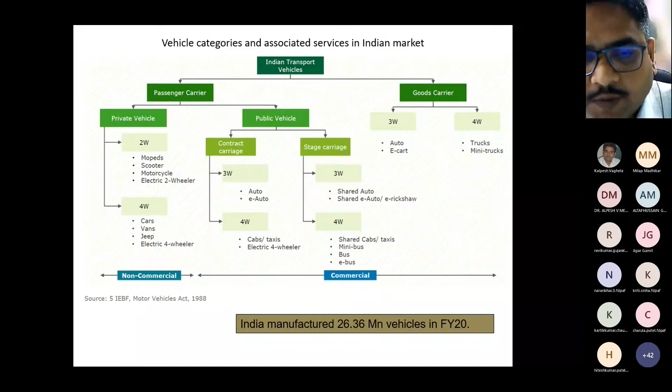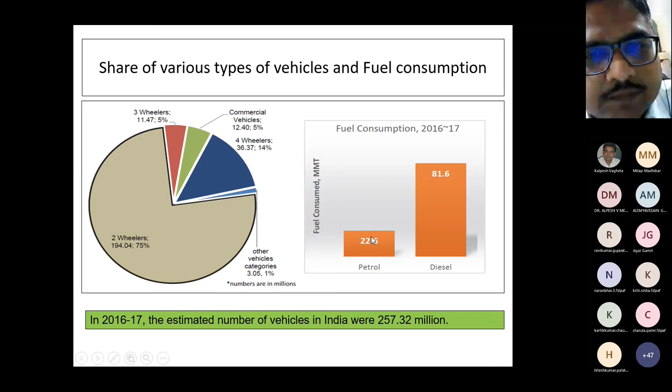So data indicates about 76 million metric tons of diesel and about 24 million metric tons of petrol is consumed by all sectors. Out of this, the Society of Indian Automobile Manufacturers estimates that 100% of gasoline, that is the 24 million tons, is consumed for the transport sector, and 50% of diesel is consumed for the road transport sector. This shows we are consuming a lot of petrol and diesel for the automobile sector.

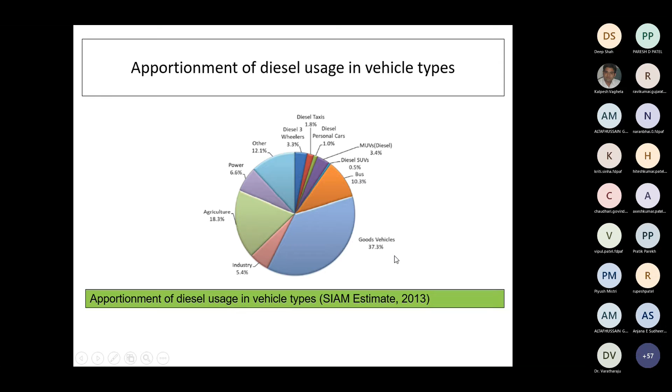In diesel also, they bifurcate the percentage used in different sectors. You can see that 37.3% is used by goods vehicles and diesel cars, and the agriculture sector uses 18.3%. Industry uses 5.4% of diesel. So mostly 50% of diesel is used by the automobile sectors.

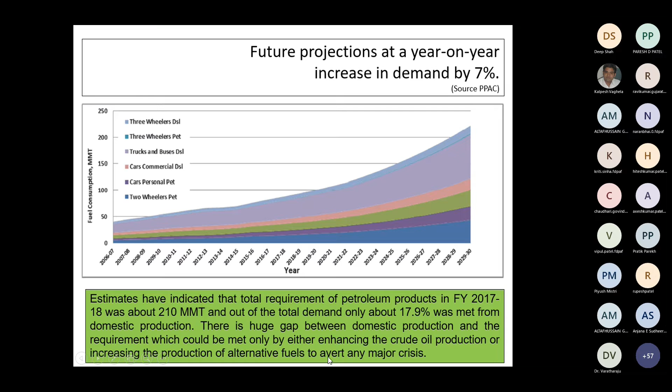Now for the future projection of fuel consumption, this graph shows that from 2006-7 to 2029-30, it is continuously increasing. Estimates have indicated that the total requirement of petroleum products in financial year 2017-18 was about 210 million tons, and out of the total demand, only 17.9%, approximately 18%, was met from domestic production. There is a huge gap between domestic production and requirement, which could be met only by either enhancing crude oil production or increasing production of alternative fuels to avert any major crisis.

If you see the domestic production as well as the import percentage, domestic production of oil is continuously decreasing due to unavailability of resources, so we have had to increase imports by 3.45% in the recent 5 years. Likewise, in natural gas also, imports increased by 8.51%. So the decline in production of crude oil and natural gas during financial year 13 to 19 has further contributed towards the country's import dependency. Crude oil import dependency is 88% in 2019, and natural gas import dependency is 36% in 2019.

This shows that a large part we take from imports, and a very small part is domestic production, which is a limitation from our side in our country.

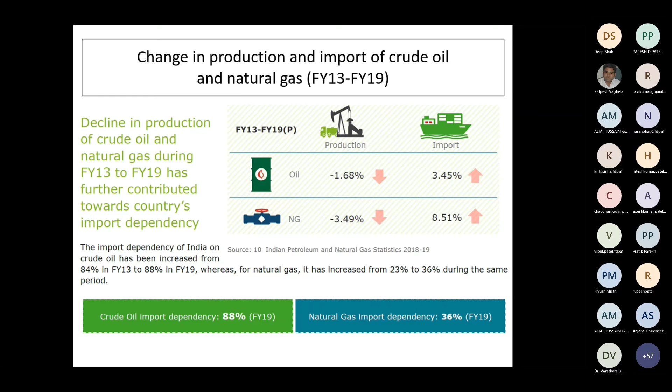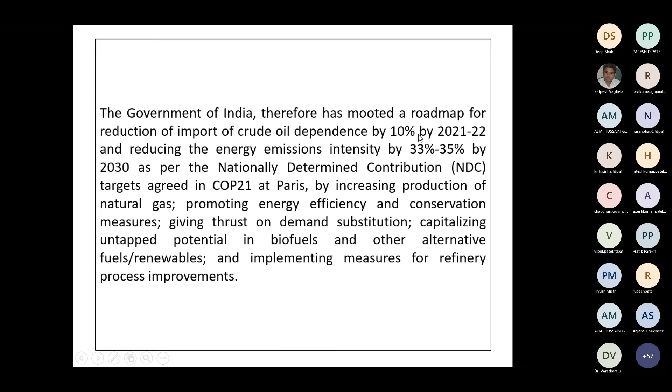Government of India has mooted a roadmap for reduction of crude oil import dependence by 10% by 2021-22. They have outlined several strategies including increasing natural gas production to reduce imports, promoting energy efficiency, and potential use of biofuels and other alternative fuels to increase the reduction in imports.

The second reason is about emissions and air pollution. What fossil fuels are we using that lead to emissions and air pollution? India was ranked 5th among the world's most polluted countries in 2019. This shows there are many sources of pollution, one of which is automobile vehicles. Also, data shows that out of the 10 most polluted cities, 6 are from India in 2019.

You can also find that 12.5% of total deaths are due to air pollution. Today itself, in the newspaper, it was highlighted that 20 lakh people died in 2020 due to pollution. With alarming air pollution levels across India, the urgency of national level action plans was therefore inevitable.

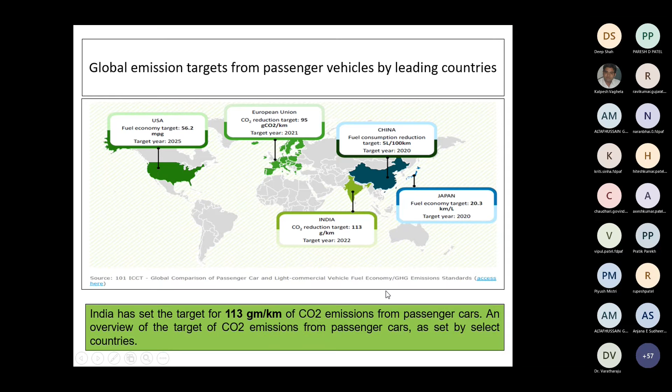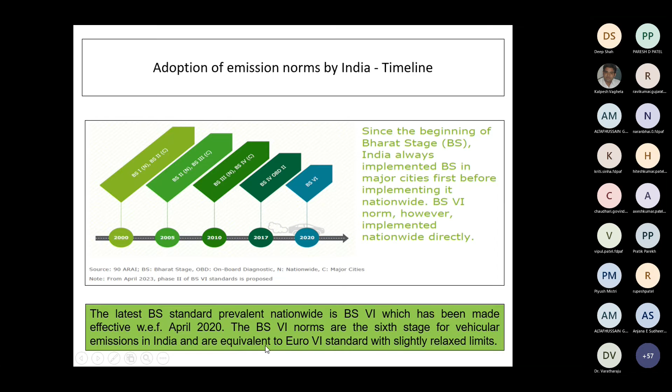Here you can see other countries' emission levels and commitments. To reduce emissions, we also introduced BS1 to BS6, with BS6 introduced in 2020 to stringent the norms about emissions from automobiles. The latest BS6 was introduced in April 2020, and BS6 norms are set for vehicular emission in India, equivalent to the Euro 6 standard with slightly relaxed limits.

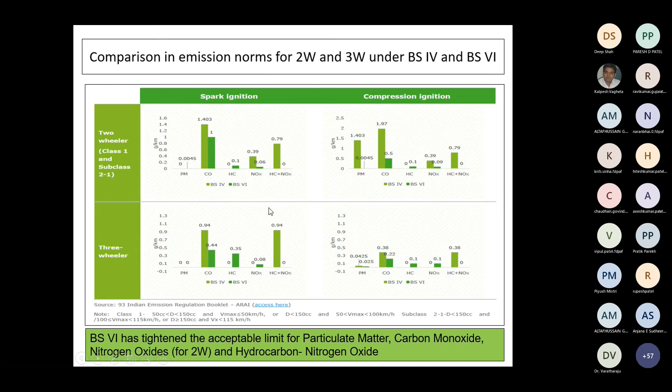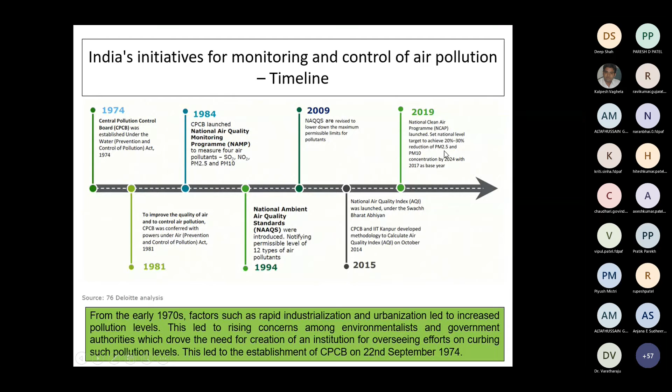A lot of policies came in 2019. There is the National Clean Air Program launch, which set a national target to achieve 20 to 30% reduction of PM2.5 and PM10 concentration by 2024. We have set a lot of parameters, and many agencies have also been developed.

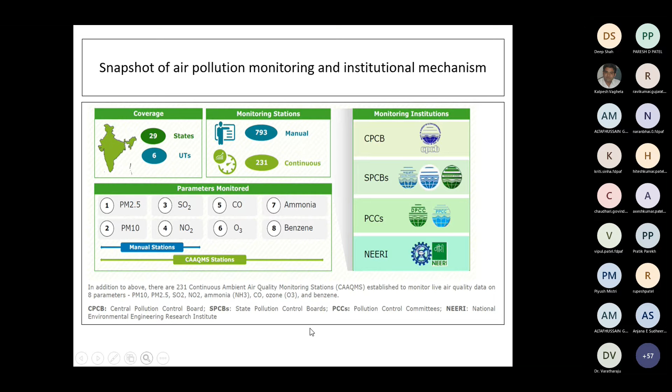At the central level, there is the CPCB. At the state level, there is the SPCB, and they monitor the parameters. Here you can see on the left side, PM2.5 and PM10. They also monitor SO2, NO2, ozone, ammonia and benzene levels. Their main function is to measure all these things and control them.

In 2015, the Prime Minister of India launched the National Air Quality Index for monitoring air quality in major cities across the country on a real-time basis, enhancing public awareness for taking appropriate action to reduce air pollution. The AQI is promoted as one number, one color and one description to inform the public about air quality in a simple and easily understandable format.

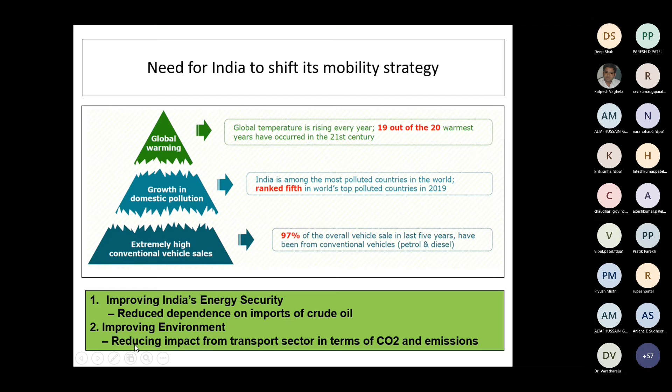So improving India's energy security - the first concern is reducing the dependence on import of crude oil. Second thing, improving the environment by reducing the impact from the transport sector in terms of CO2 and emissions.

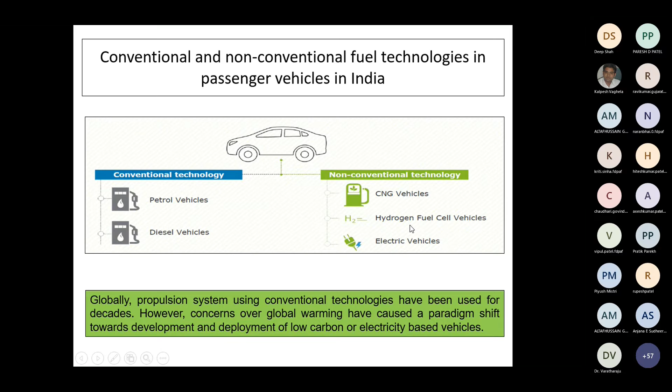Conventional fuels are petrol and diesel. Non-conventional fuels we all know include CNG, hydrogen, biofuels and electrical fuels. The alternative fuels - we have to shift towards alternative fuels, and there are several potential solutions to earlier discussed issues: reduced consumption, increased production, or shift towards alternative sources of energy.

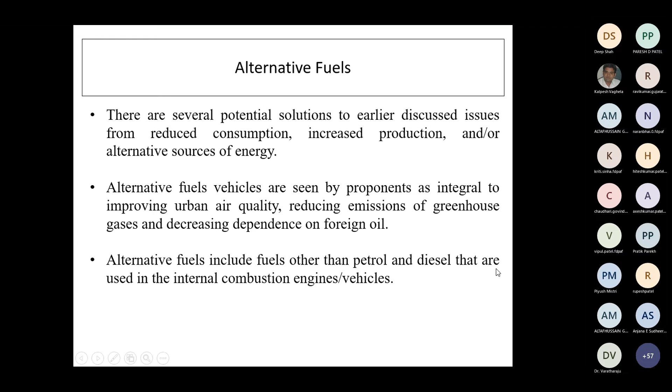Alternative fuels include fuels other than petrol and diesel that are used in IC engines or vehicles. Alternative fuels provide the best option to replace traditional fossil fuels and provide opportunity for reducing import of oil bills and mitigation of pollution, and can be produced sustainably. So here that is the main thing, that it can be produced sustainably.

Second thing is that alternative fuels are a focus area of the world also due to their inherent benefits in terms of economy, high quality of energy, environmental compatibility and renewability. Therefore, several countries like USA, Brazil, Canada, Australia, China, Thailand and most European countries are in the process of transitioning to a higher share of alternative fuels to avoid economic and environmental crisis.

There are so many alternative fuel options in India for automotive purposes. First, in public transport, we shift towards CNG or LNG. There are others too - hydrogen, biofuels, electric and solar power mobility would form options for alternative fuels. We will take them one by one in brief.

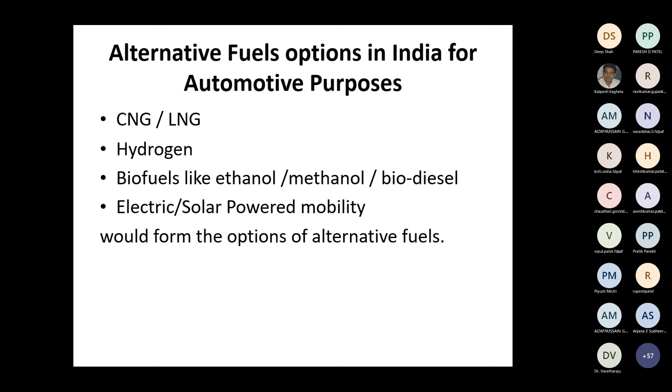CNG is compressed natural gas. We are all aware that it is methane stored at high pressure. Italy was the first country to use natural gas as a vehicle fuel in 1920.

GAIL India initiated pilot programs in 1992 to use CNG as a vehicle fuel in India in collaboration with the Indian Institute of Petroleum in 3 cities, namely Delhi, Mumbai and Baroda. So from 1992 we started working to use CNG as an alternative fuel.

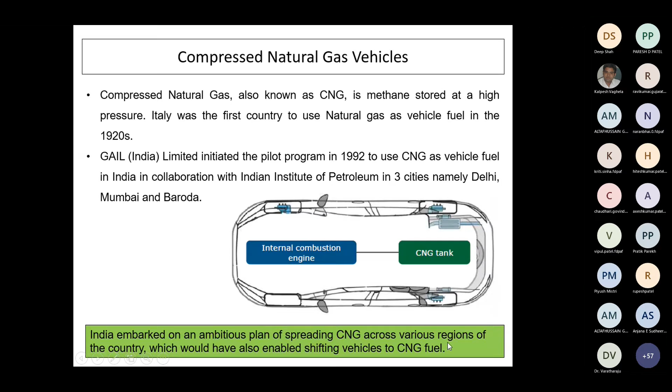So here we install CNG tanks that can be used in CNG vehicles. India embarked on ambitious plans of spreading CNG across various regions of the country, which also enabled shifting vehicles to CNG fuel.

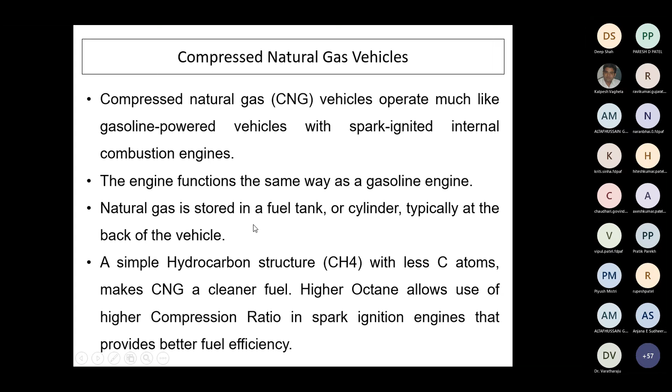CNG vehicles operate much like gasoline powered vehicles with SI engine technology. Engine functions are mostly the same as gasoline engines, and natural gas is stored in fuel tank cylinders typically at the back of the vehicle.

So CNG vehicle technology available in India has two types. One is dedicated CNG engines, which only work on CNG.

So those are the dedicated CNG engines. The second one is bi-fuel retrofitted gasoline engines, which we normally get in personal cars and personal vehicles. These run on bi-fuels, either CNG or gasoline. You can retrofit CNG kits into your vehicles.

That comes in two portions: one is the tank, and one is the ECU for the CNG along with the injection valves. So that can operate both on petrol as well as on CNG.

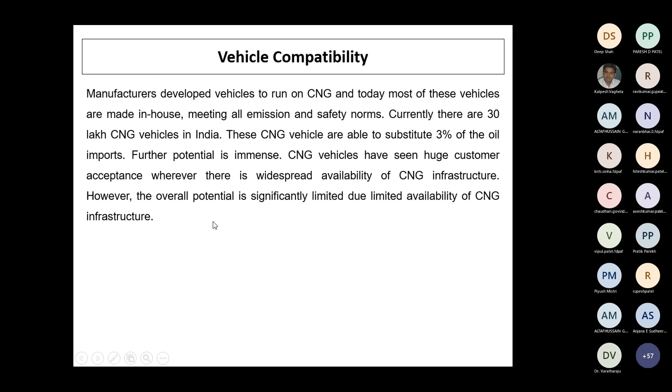Vehicle compatibility: manufacturers normally develop vehicles that can be compatible with both CNG and petrol, so we can easily move towards CNG. But overall potential is significantly limited due to the limited availability of CNG infrastructure, because we need to develop a lot of CNG pumps and stations in the country.

If you see the current trends or data of 2019, you can find a lot of data on states having CNG stations. Gujarat is the leading state, providing about 400 CNG stations, and it has 8 lakh CNG vehicles currently running. From 2014 to 2017, CNG sales increased drastically. Next, Delhi and Maharashtra are also working on this and consuming a lot more CNG.

Right now there are 1730 CNG stations set up, with a total of 33.47 lakh CNG vehicles on the road up to 2019.

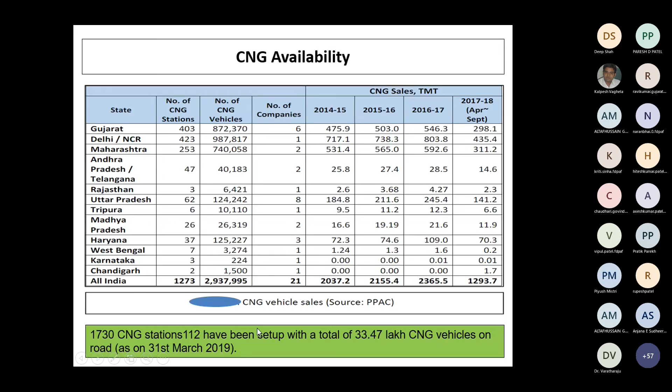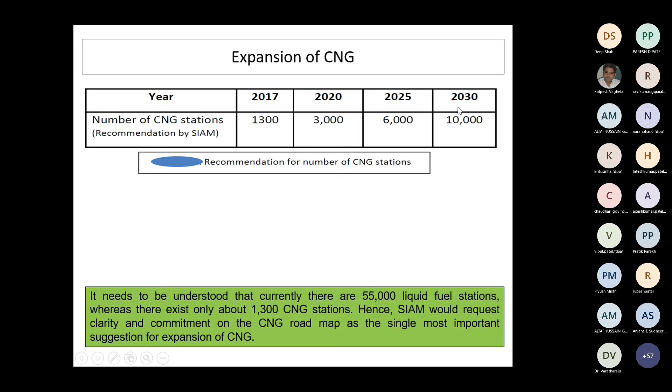For future expansion, in 2017 there were 1300 CNG stations, and India is aiming for 10,000 CNG stations by 2030. So they are trying to build infrastructure to make CNG available all over India. The aim is to get 10,000 CNG stations across India.

Importance of CNG: it is a very cheap fuel. If you compare with petrol, taking today's petrol price as 100, then CNG price is 62 per kg, and it also has a higher average on the vehicle.

Lots of advantages come from CNG: it has dual fuel facility, low operating cost, and is a safe fuel. It also gives less emissions, so it is eco-friendly and convenient. It is also easy to adopt CNG technology in existing vehicles. So those are the advantages of CNG vehicles.

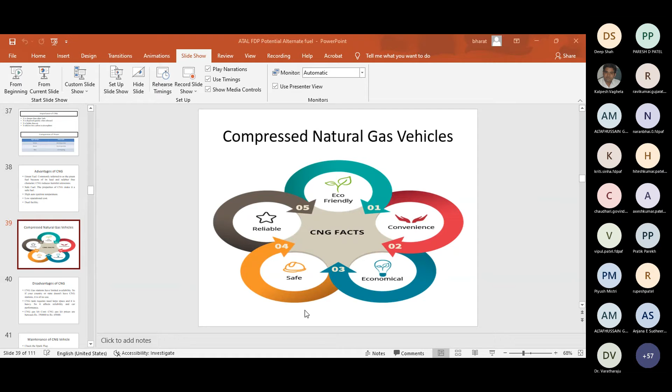The disadvantage is that it requires a lot of infrastructure to build CNG stations on the road; only then can you drive your vehicle on those roads. In Gujarat, there is sufficient infrastructure, but after Gujarat, there are very limited resources in Rajasthan, which limits the use of CNG in the market.

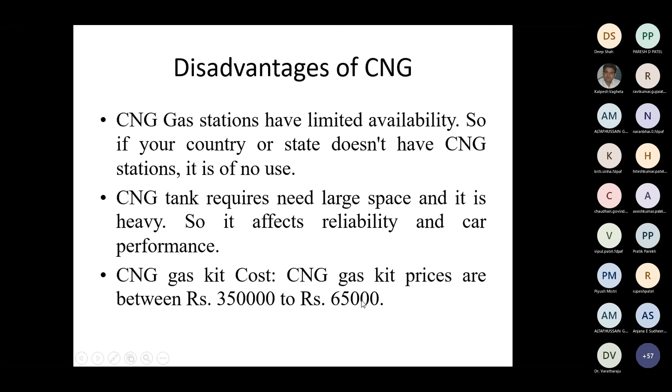Also, the CNG gas kit has a price ranging from 35,000 to 65,000. There are also some issues with maintenance of the vehicle: you need to check the spark plug and replace it repeatedly, clean the air filters and other things, and check the CNG tank after 3 years. So those are some limitations of CNG vehicles.

The second option is liquefied natural gas. It is a low carbon fuel formed by liquefying methane at a low temperature of around -160 degrees Celsius, which, being stored in the liquid state, increases energy density and can be stored at moderate pressure in smaller fuel tanks. LNG is among the cleanest fuels, with the least emission of pollutants like SO2, NO2, CO. Greenhouse gases are substantially reduced using LNG. The emission factor of LNG is only 56,000 kg per terajoule, which is two-thirds compared to diesel. You can say LNG can reduce CO2 by around 30% compared to diesel-run vehicles.

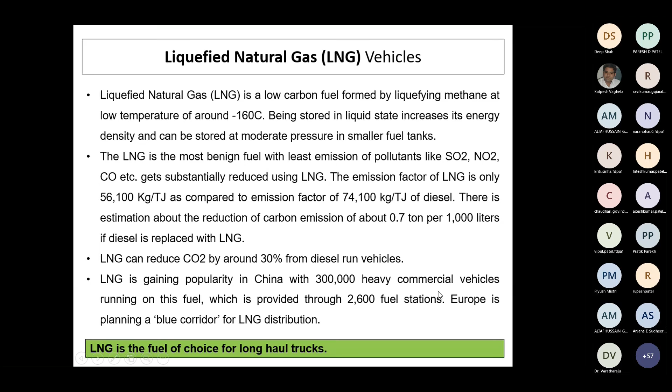LNG is gaining popularity in China; around 3 lakh vehicles in China run on LNG. Europe is also trying to create a blue corridor for LNG distribution. LNG is a fuel choice for long haul trucks.

LNG needs to be stored in cryogenic tanks onboard vehicles. Since it is stored in a liquid state, the size of the tank is very small, but you require a cryogenic setup in your vehicle. The major benefit is that for long haul vehicles, you can travel around 600 to 700 kilometers using LNG, which is 3 times that of CNG tanks. It is also very fast to fill the tanks, about 200% faster than CNG. So people are also considering using LNG.

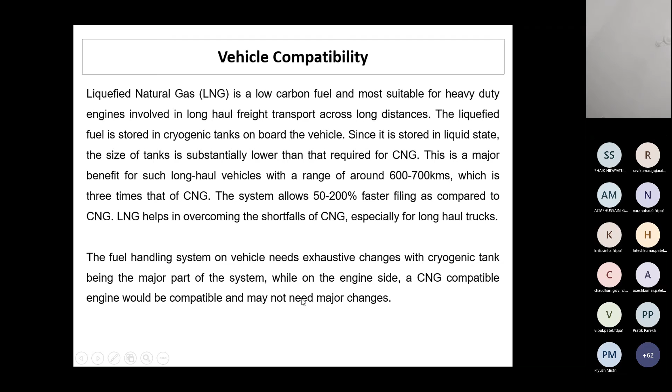The fuel handling system on the vehicles needs exhaustive change, with the cryogenic tanks being a major part of the system. On the engine side, a CNG compatible engine may not need major change, but you require the cryogenic setup. The vehicle compatibility requirement is to set the cryogenic tank inside the vehicle, which increases the cost of the vehicle also.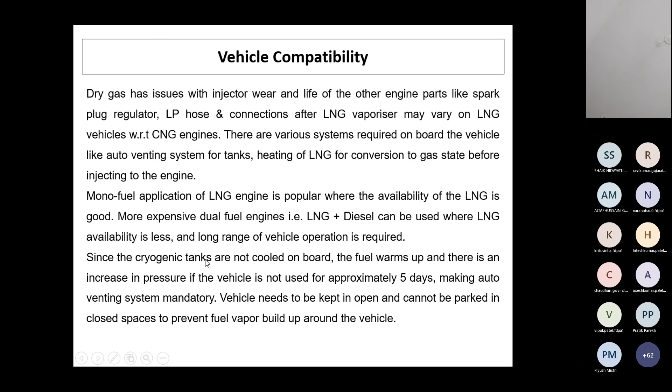Vehicles need to be kept in the open and not parked in closed space, to prevent fuel vapor buildup around the vehicle. So certain care should be taken with LNG also.

LNG availability in India is significant. Dahej has 15 metric million ton capacity, Hazira is 5, Dabhol is 5, and Kochi is 5, giving a total of 30 metric million ton per annum LNG capability. Petronet is setting up 20 LNG stations at petrol pumps on the highway on the west coast, connecting Delhi with Thiruvananthapuram, covering a total distance of 4,500 km via Mumbai and Bangalore. So the India government is also thinking to develop LNG stations across highways for heavy vehicles.

LNG trucks are expected to be costlier than the diesel counterpart due to the cryogenic tanks. High cost of the cryogenic tank is the major cost addition to the vehicles. Due to this, there is very limited use of LNG in the market; you will mostly find CNG technology offered, not LNG technology, because the cryogenic tanks that need to be mounted on the vehicles add a lot of cost and require a lot of maintenance also.

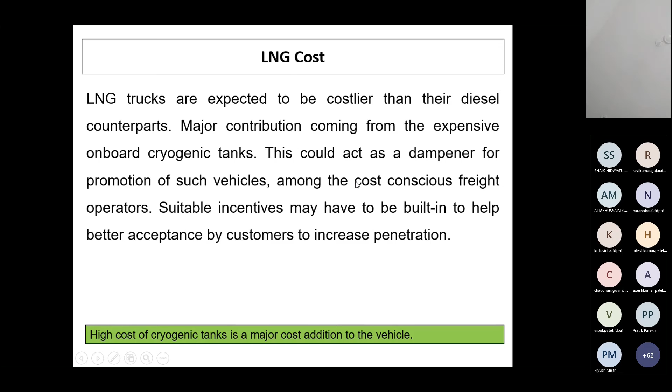The third option is biofuels. Domestic biofuels provide a strategic opportunity to the country as they reduce the nation's dependence on imported fossil fuels. When utilized, biofuels can be environmentally friendly as well as sustainable. That is a big point, that biofuels can give environmental benefits also.

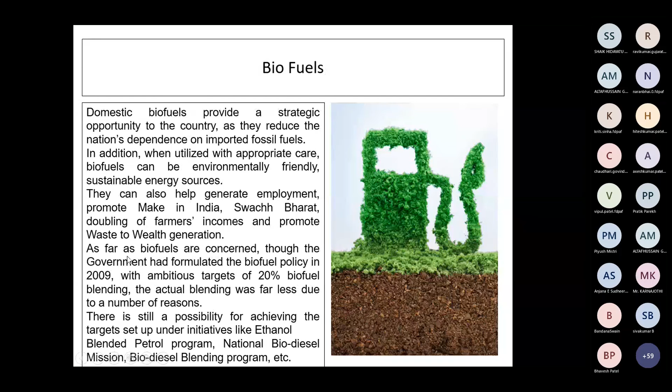They also help generate employment in India, like through the Make in India program, and also provide Swachh Bharat mission support. As far as biofuels are concerned, the government formulated a biofuel policy in 2009 with an ambitious target of 20% biofuel blending. The actual blending was far less due to a number of reasons. There is still a possibility to achieve the target set under initiatives like the Ethanol Blending Petrol program and the National Biodiesel Mission, biodiesel blending programs, to increase the use of biofuels as a blended fuel.

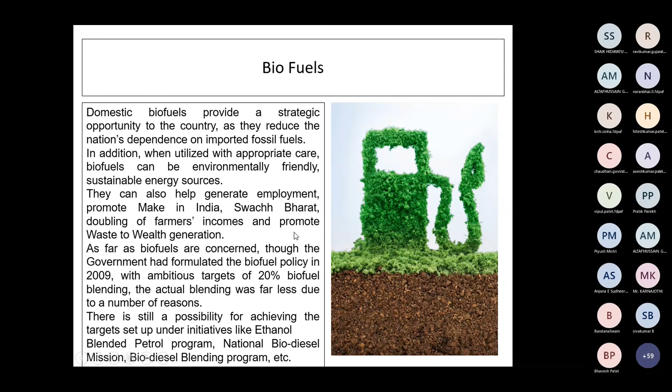Ethanol is one of the principal biofuels, naturally produced by fermentation of sugar by yeast, or via petrochemical processes such as ethylene hydration. The most common biofuels can be obtained from sugar cane, sugar beet. It is also produced from starch-containing materials such as corn, cassava, and other crops, including cellulose materials. However, in India, 98% of ethanol is produced from sugar cane molasses.

Ethanol blending offers significant advantages such as an increase in the research octane number of the blend. The calorific value of ethanol is two-thirds of gasoline, which indicates that increasing ethanol content will decrease the heating value of the ethanol-gasoline blend. Hence, more fuel is required to achieve the same engine power output. However, ethanol has a high octane number, so the engine can be operated with a high compression ratio without knocking, which increases engine efficiency considerably. So you can use a blend of ethanol with petrol to get better economy and also a good calorific value.

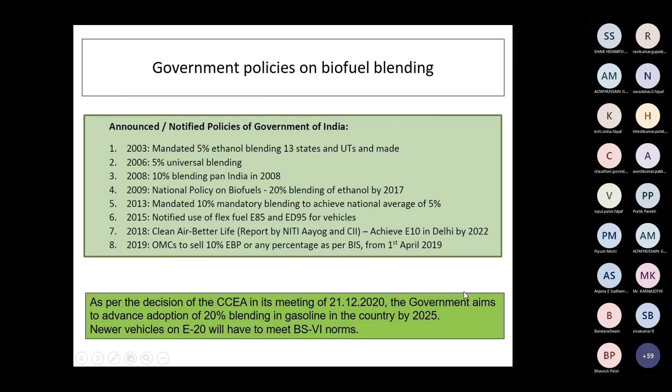Government policy on biofuels has been announced from 2003 to 2019, continuously focusing on how to increase the use of biofuels. Recently, in December 2020, the government aims to advance adoption of 20% blending of gasoline in the country by 2025. Newer vehicles for E20, meaning 20% blend, will have to meet BS6 norms also. So the government shifted the 20% blending target from 2030 to 2025 earlier it was decided to reach it by 2030, but now they have decided the limit for 20% blend should be 2025 only. There are so many policies indicating the mandatory use or blending of biofuels.

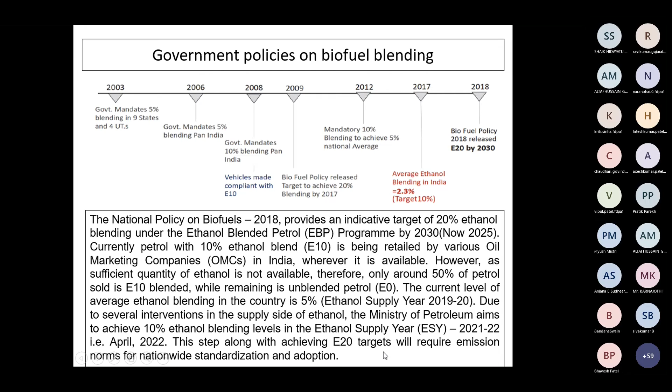In 2012, the government mandated a 10% blend of biofuel, and now they aim for 20% by 2025 through the Ethanol Blended Petrol (EBP) program. They have set limits for oil marketing companies (OMCs) to reduce the use of natural petrol and diesel, allowing up to 20% ethanol blend in petrol, creating E20 fuel that can be used easily in the market.

If you compare the environmental impact of E20 fuel with normal gasoline, there is a 50% lower carbon monoxide emission when E20 is used in two-wheelers, and a 30% lower carbon monoxide emission when used in three-wheelers or four-wheelers. This is very beneficial from an environmental perspective, as ethanol blending helps decrease emissions in both two-wheeler and four-wheeler cases.

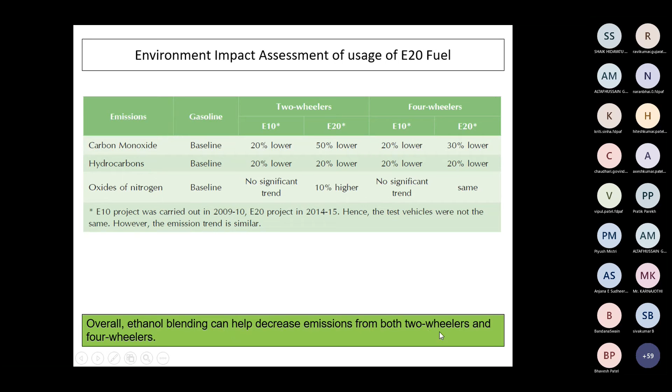Production of EBP compatible vehicles: currently produced two-wheelers and passenger vehicles in the country are designed optimally for E5, a 5% blend of ethanol in petrol. We aim that by 2023 we can move toward E10, meaning 10% mixing of ethanol, and from 2025 we can use vehicles with E20 tuned engines rolled out across the country from April 2025. These vehicles would run on E20 only and provide high performance. The government aims to modify vehicle technology to support E20 biofuel, changing engines and some plastic components used in them.

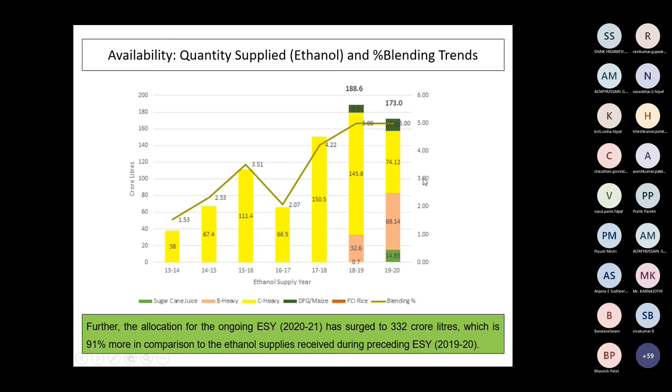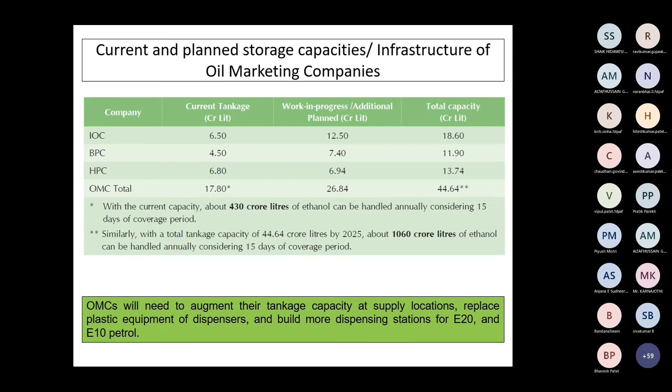OMCs are also trying to increase capacity to store ethanol blended petrol. There is an ethanol blended petrol production and rollout plan given by the government, which continues to increase.

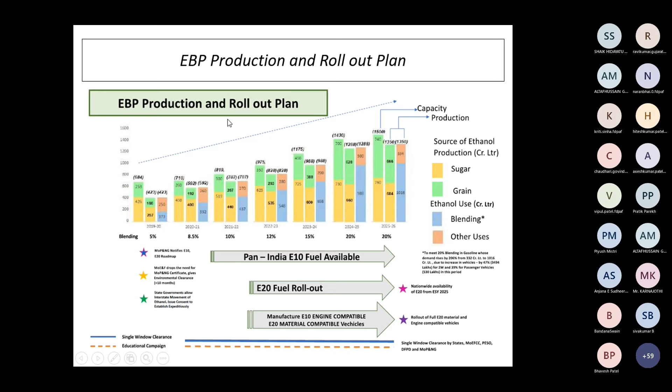The next option, other than bio-ethanol blended oil or petrol, is biodiesel.

Biodiesel is a methyl or ethyl ester of fatty acid produced from non-edible vegetable oils, acid oils, used cooking oils, animal fats, and bio oils. Biodiesel is renewable, biodegradable fuel manufactured domestically from vegetable oils, animal fats, and recyclable restaurant grease.

The Government of India initiated a biodiesel purchase policy in October 2005, permitting sale of biodiesel B100 by private manufacturers to bulk consumers. Retailing of blended biodiesels by public sector oil companies started in 2015, extending up to a 5% blend. Passenger and commercial vehicles today are material compatible with this 5% biodiesel blend diesel, so you can mix 5% biodiesel in normal diesel as per current policy.

You can go for the biodiesel production process, but this will be discussed in depth with other experts in a future session, so I'm not touching this. The properties of biodiesel, if you compare, are almost the same as diesel.

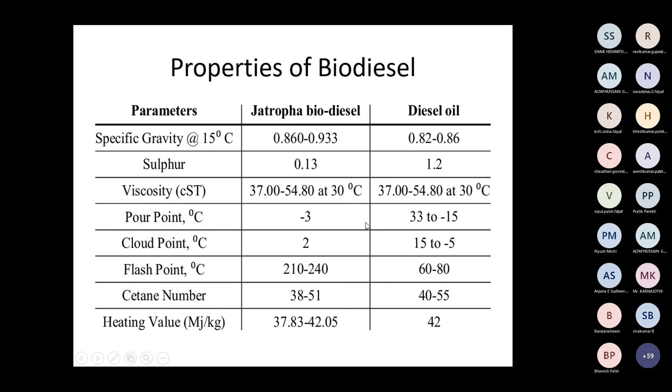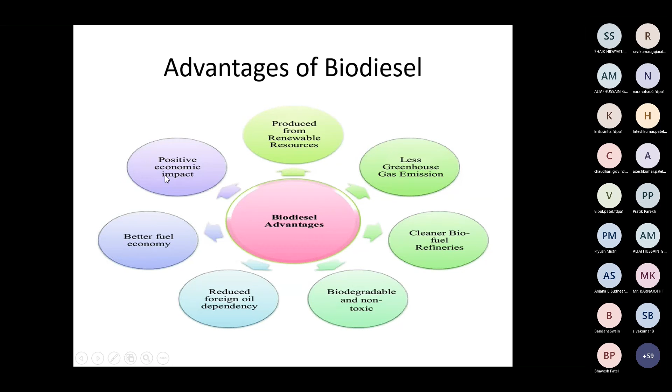There are many advantages of biodiesel: less greenhouse gas emissions, cleaner biofuel refineries, biodegradable and non-toxic, reduced foreign oil dependency, better fuel economy, and positive economic impact. So there are a lot of advantages from biodiesels.

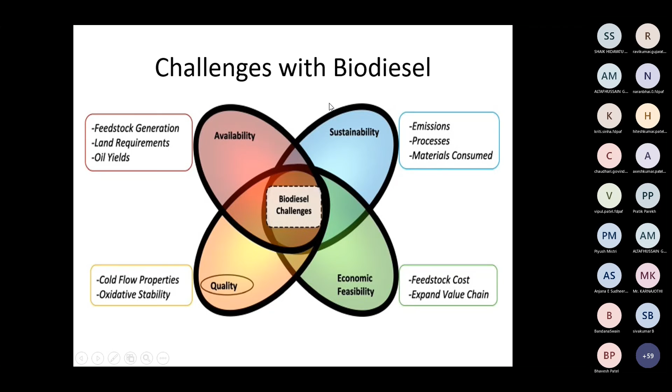Large scale blending of B100 and releasing B5 is achieved mainly in Tamil Nadu, Telangana, West Bengal, and a few other states, which are using large scale biodiesel blending. Despite the blending targets outlined in the previous biodiesel policy, the percentage blending of biofuels was not encouraging enough — the increase in blend rate is very small, approximately 0.001% only. Although there are many policies, people are still facing certain problems.

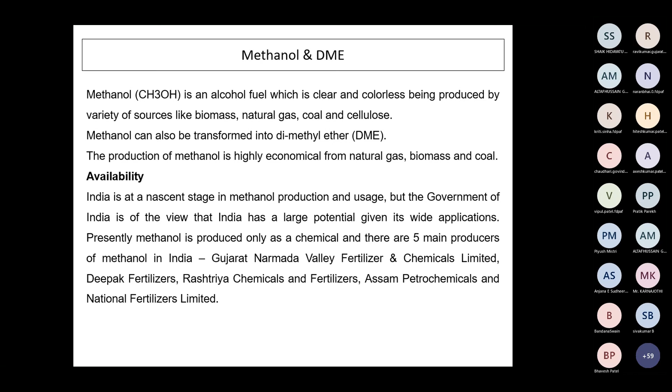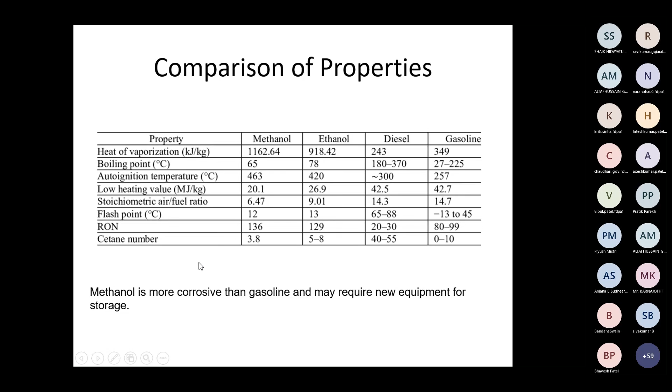A comparison of the properties of methanol, ethanol, and diesel is shown here. You can see methanol is more corrosive than gasoline and may require new equipment for storage, so people are less focused on methanol. Mostly they are focusing on CNG and biofuels in the diesel sector, and ethanol in the petrol sector.

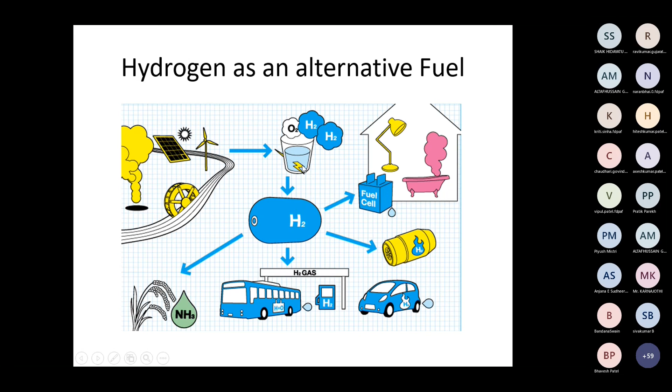The next fuel is hydrogen as an alternative fuel. In foreign countries, people are proposing to use hydrogen as an alternative fuel in heavy vehicles like buses. Nowadays you can see a lot of photos of hydrogen buses on websites of foreign countries working on hydrogen. The interest in hydrogen as an alternative transportation fuel stems from its ability to power fuel cells in zero emission vehicles, its potential for domestic production, fast filling time, and high efficiency. Hydrogen can also serve as a fuel for normal internal combustion engines.

Hydrogen vehicle is a type of alternative fuels vehicle that uses hydrogen fuel for motive power.

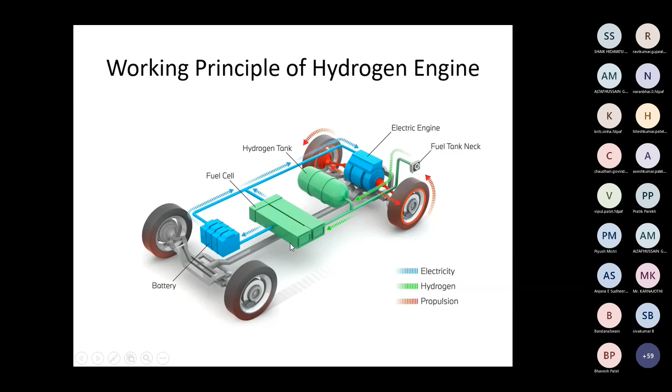The working principle of the hydrogen engine is shown in this figure. You can see there is a hydrogen tank, a fuel cell, and a battery that is charged with the fuel cell, which runs the electric motor. So more or less it is near about same as an EV, only the fuel tank, hydrogen tank and fuel cell are additional aspects compared to the EV, which give charging to the battery and current to the battery.

The fuel cell is a device that takes the chemical energy in the form of hydrogen and turns it into electricity that can power the electric motor, just like a battery.

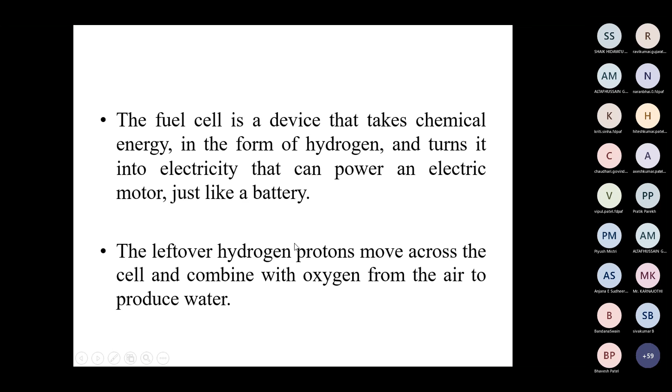You can extract hydrogen from biomass, natural gas, coal, petroleum gas, electricity, and nuclear. So there are a lot of ways to get hydrogen from the surroundings.

There is also a certain sustainable path of hydrogen shown in this figure, that you can get hydrogen from solar energy, and also from biomass.

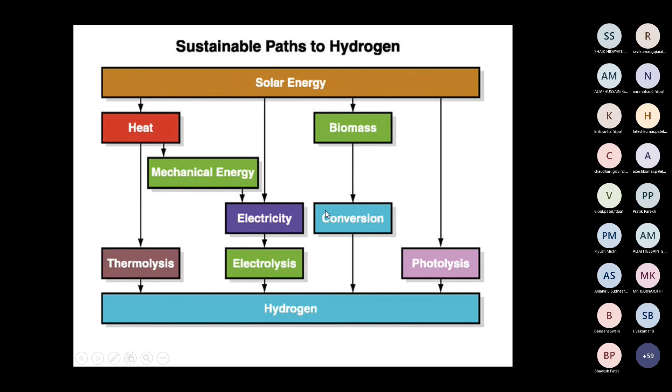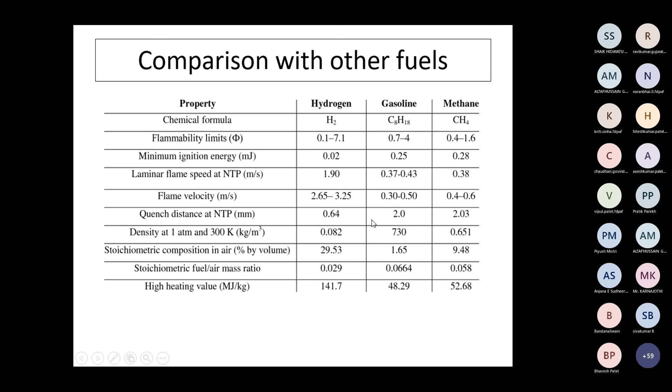If you compare the properties of hydrogen with gasoline and methane, you find a lot of similar characteristics. But the main thing is that it has a high heating value compared to all fuels. It is a very good calorific value or high heating value, so that increases your mileage and also reduces the running cost.

So hydrogen can be stored in the compressed form, or in the cryo-compressed form, or in the liquid form. There are so many ways to store hydrogen physically, and material bed hydrogen storage can also be done.

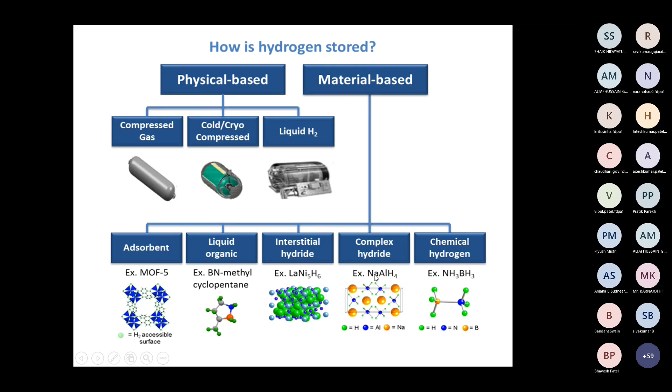Here we will also give one expert session on hydrogen fuels in the next upcoming session. So I'm running very fast as we are taking a lot more time due to the inauguration of the AICTE ATAL. So I'm skipping some slides.

There are so many advantages of hydrogen. One of the big advantages is economical competitiveness, and faster refueling, and clean fuel.

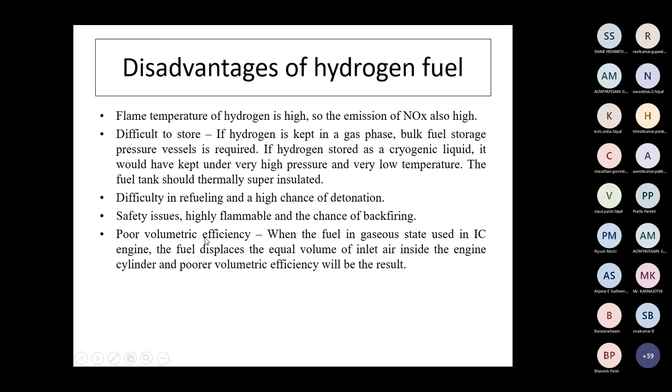Disadvantages of hydrogen: the flame temperature of hydrogen is high, so emission of NOx is also high. Difficult to store - if hydrogen tank is kept in the gas phase, bulk fuel storage is required. Difficulty in refueling and high chance of detonation is there in hydrogen. Poor volumetric efficiency is also one factor for hydrogen fuel.

Regarding the development of India about hydrogen: IOCL and the Society of Indian Automobile Manufacturers started in 2005 and collaborated to undertake a pilot project to set up hydrogen and HCNG dispensing stations in 2005. In the following year, 2006, India notified the National Hydrogen Energy Road Map. So they gave a roadmap in the bid to make itself a hydrogen-based economy.

The roadmap proposed 1 million hydrogen-based IC engine and fuel cell vehicles by 2020, but it is not made yet. In September 2007, MNRE, the Ministry of New and Renewable Energy, supported a project demonstrating hydrogen up to 30% blended with CNG in 7 automobiles, with the help of SIAM.

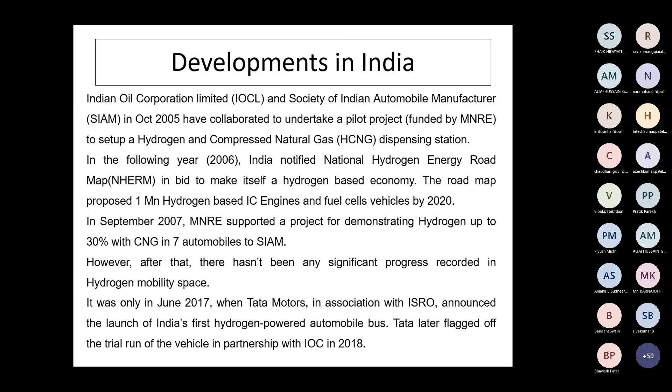However, after that, there hasn't been significant progress recorded in hydrogen mobility space after 2007. It was only in 2017 when Tata Motors, in association with ISRO, announced the launch of India's first hydrogen powered automobile bus, and Tata later flagged off the trial run of the vehicle in partnership with IOC in 2018. So very limited work has been done in hydrogen with perspective to India - it is only on paper or at some research stage only.

If you relatively assess the alternative fuels for different criteria - comparing CNG, LNG, LPG, ethanol, biodiesel, methanol, dimethyl ether and hydrogen - you will find that reduction of CO2 is more in hydrogen and CNG and LNG. There is also some significant benefit in biodiesel and ethanol.

Local sourcing possibility is a major factor to shift the technology from fossil fuel to alternative fuel. You can find that CNG has triple plus signs, so it's more easily adaptable and has more possibility as a source. Ethanol is also having more possible source, and methanol is also having more possible source. But there is very less for LNG, and hydrogen also has very less sourcing capability, you can say.

And replace, reuse, reduce - you can do all this with the help of these fuels. So this is a relative assessment of the alternative fuels. There are various options to diversify fuels beyond gasoline and diesel in different categories, with various benefits compared to each other.

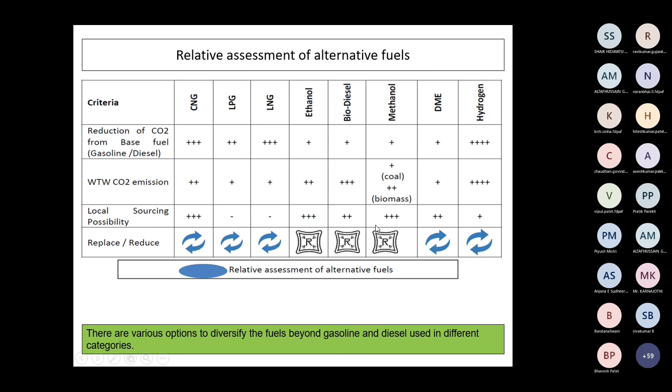Now, if we go for the next segment - earlier we discussed various options of alternative fuels. Now, alternative technology: we are not going to change the fuel, we are going to change the technology. Here the alternative technology is electrical mobility.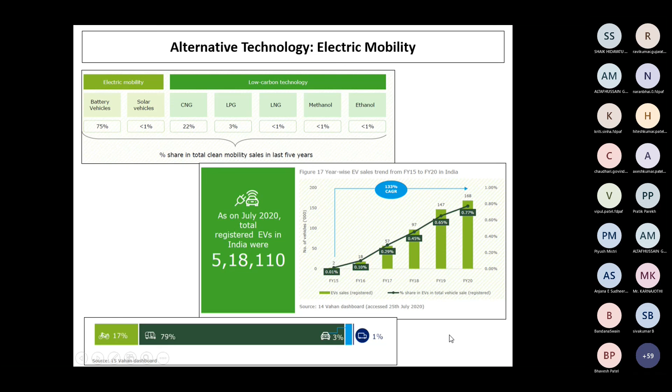The Indian government has also implemented many policies and is focusing more so that we can take benefit of electrical vehicle technology.

In 2011, they announced the National Council for Electrical Mobility. After that they introduced many more policies. In the timeline you can see a lot of adoption policies and guidelines issued by the government, with 2 or 3 guidelines every year for EV vehicles.

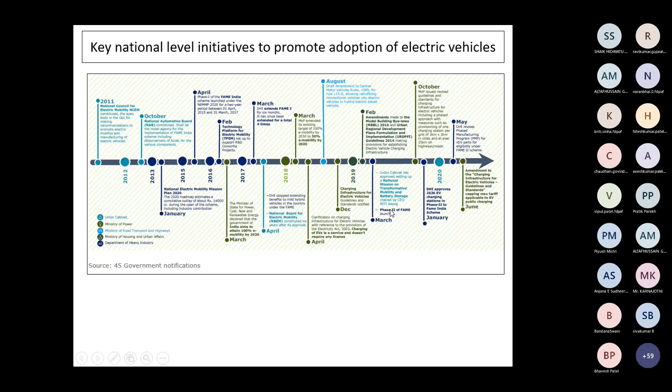The state government has also given some subsidies so that people can easily use EV vehicles and take the benefit of EV. There are many things in the EV segment regarding how you can use it.

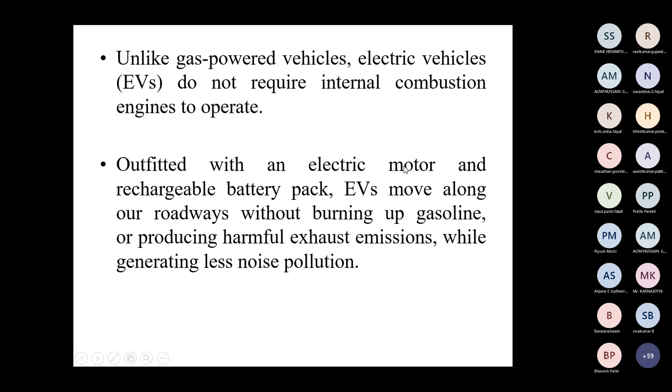You can use EV cars, as written here. You can go for the plug-in hybrid EV car, where you can use both petrol and electrical power. That is normally available in China - a lot of cars there are hybrid based. In India, you will normally find pure EVs.

EV's main components are the motor. There are BLDC motors on all four wheels or two front wheels of the vehicle. You have the battery, on-board chargers, and electrical power control units. These are the various components of the EV.

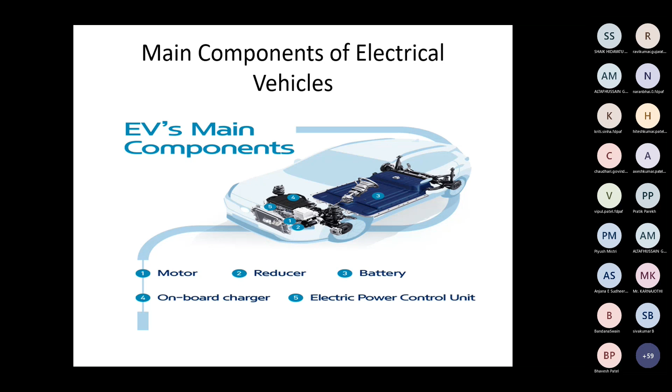There is one special section of the EV that will also be covered in an upcoming session, so I'm not focusing on it now. The types of EV are pure electrical vehicles, hybrid electrical vehicles, plug-in hybrid vehicles, and mild hybrid vehicles - these are the four basic types. In India, we normally focus on EVs, while in China you will find HEVs.

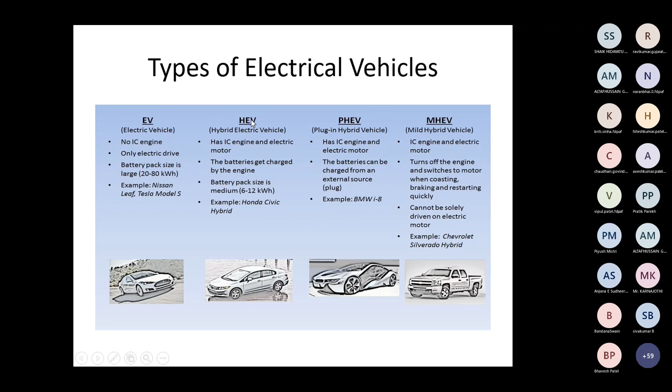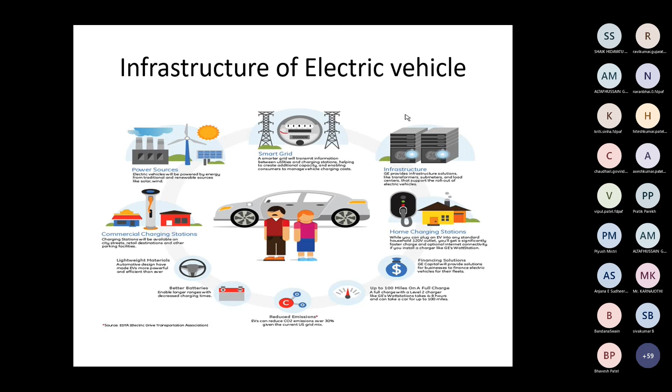You require good infrastructure for the EV, more charging stations so vehicles can be charged very fast, and battery stations to support EV vehicles. The government has also announced a lot of subsidy to establish charging stations across highways and roads. Benefits of the EV are that it is very cost effective, reduces harmful gases, is cheaper, and reduces noise pollution.

It's also energy independent, so we don't have to import fuels from outside. There are certain drawbacks: the initial investment is very high. The initial cost of an EV car is more than 18 lakhs - nowadays you are getting EV cars from Tata, like the Tata Nexon, costing 18 lakhs. This is a big issue since compared to a normal vehicle, it costs 60% more.

Longer recharge time if you charge at home is a disadvantage of e-vehicles. You also require battery replacement, which is also costly.

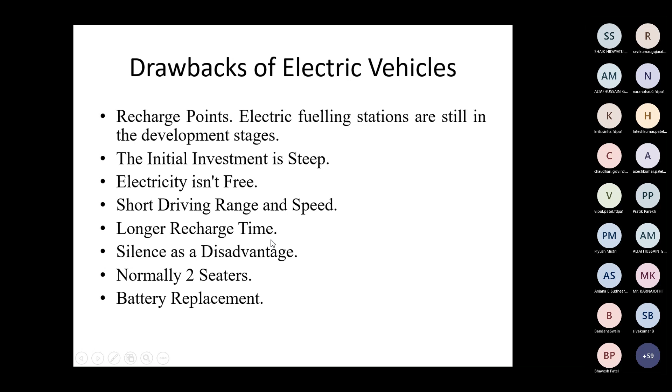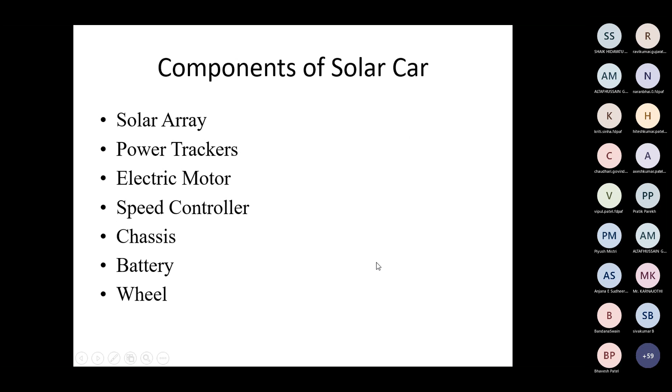The next one is solar powered vehicles. In India, less work is done on solar power, but solar powered vehicles can be used as electrical vehicles powered by solar energy, with photovoltaic cells used on the vehicles. Here you can see the components of solar powered vehicles.

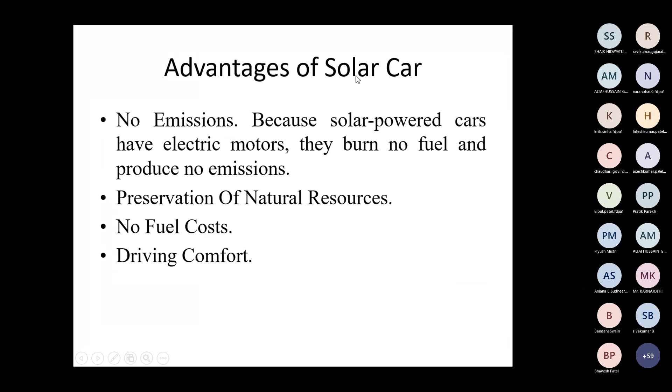The advantage of solar power cars is no emissions, preservation of natural resources, no fuel cost, and comfort of driving. But with limitations - the power density is very low, so it cannot be easily used for vehicles. You require a very long vehicle to get sufficient energy from sunlight. The cost of PV cells is high, and although sunlight is free, you require good infrastructure which is costly to make in vehicles. Also, even though sunlight has no lifespan, the PV cell has a certain lifespan, which limits the use of the solar car.

Today's presentation uses data related to the Indian economy based on three major references. The first is a white paper on alternative fuels for vehicles given by the Society of Indian Automobile Manufacturers, published in 2019. It is a very good resource where all the data related to India is given - the percentage of alternative fuels used in India up to 2019 is shown, along with recommendations given to the government. It's a very useful document used in my presentation.

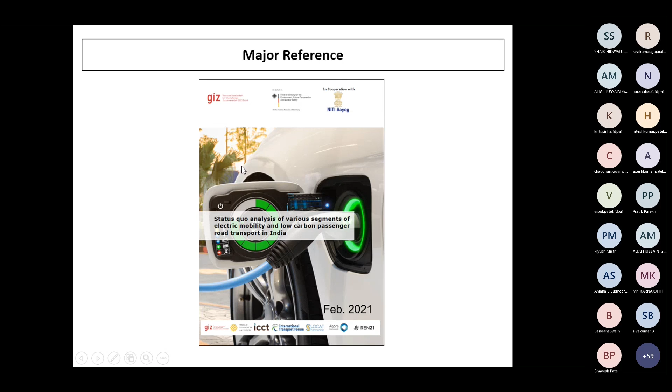The second reference is a February 2021 resource - Niti Aayog has published a report on the status quo analysis of various segments of electrical mobility and low carbon passenger road transport of India. This 340-page report is good enough to get data and technology information for electrical vehicles, covering a lot of things about them.